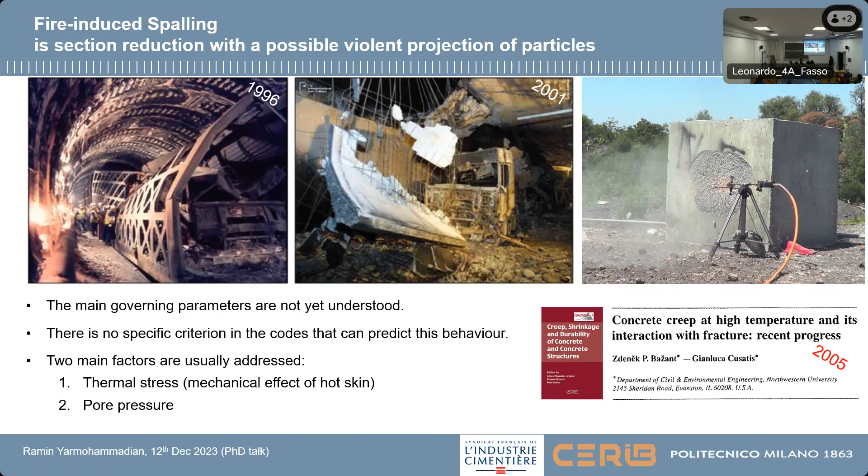But as I mentioned, there is no consensus. No one knows the real behavior, and no one can predict it well. So today we want to explain it in a different way.

In our new perspective, spalling consists of two stages: the first stage is cracking, and the second stage, which follows, is instability of the crack. In my thesis I started by explaining the first stage, the crack generation.

For example, I used results from another PhD student to see how the combination of thermal stress and effective pore pressure can generate spalling in ultra-high performance concrete, in a cylindrical specimen. The combination of both gives a constant value for each concrete, so it's kind of a material property, a threshold.

But with different boundary conditions, the share of these two combinations is different. So with higher heating rates, we get a higher share of thermal stress.

However, mostly my thesis is concentrated on the second stage, which we think is more important, because usually when we assess structures after fire, we see the crack that is there, but the instability of the crack was not completely realized.

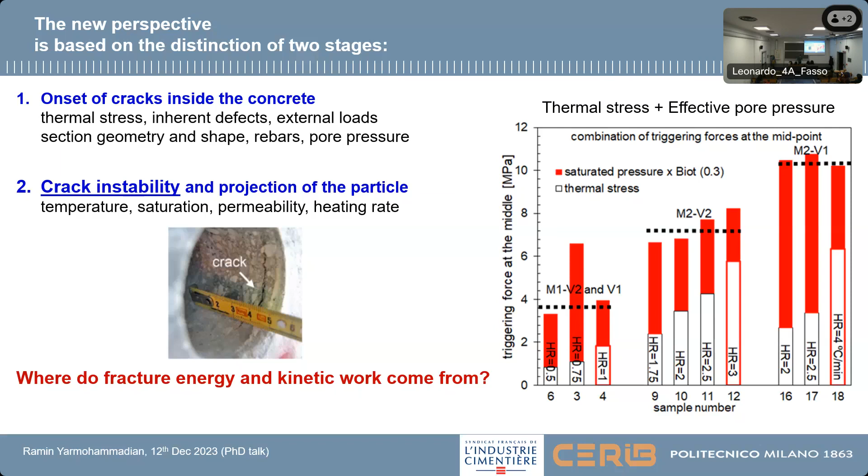As I mentioned, the whole spalling event consists of two stages. If we sum up the energy needed for the whole spalling: we need energy for fracturing the concrete, about half a kilojoule per square meter for a 1 meter by 1 meter concrete, and for accelerating those particles we need about 2 kilojoules per square meter. Summing both, it's 2.5 kilojoules per square meter needed for the spalling.

So what are the alternatives, the options to provide this energy for such an explosive event? The first one is elastic strain from thermal stress. The whole energy stored in the whole concrete cover is 1 kilojoule per square meter, which is not enough for that high energy requirement. So we need to look for an alternative.

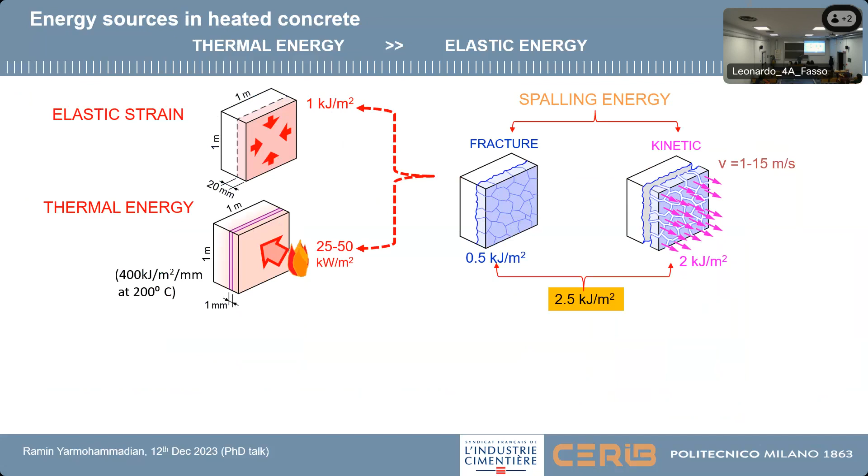And for sure, an alternative in heated concrete might be the thermal energy. Imagine if in just 1 second, 25 to 50 kilojoules is entering the whole cross section. So we have a lot of thermal energy there. And then we are comparing an elephant to a mice.

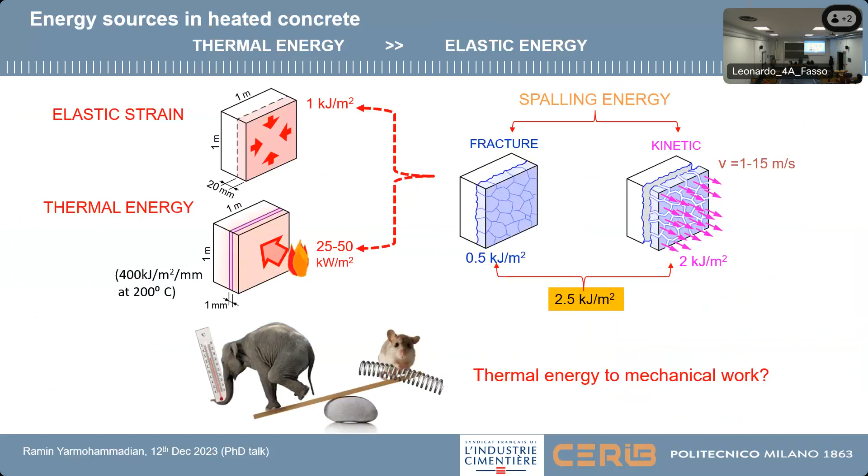So this is the real issue. But the issue is how we can convert thermal energy to mechanical work. And the missing part can be found in the steam engine. In a steam engine, we have thermal energy, and work can be done by means of the water. Water can be vaporized, expand, and then this conversion can be easily done.

So in concrete, we have almost the same problem. We have a porous medium, which is concrete, and these pores can be filled or semi-filled with water. Now 90% of the mass is solid. And these solids, when heated up to 200 or 250 degrees Celsius, can instantly provide energy to the water stored in the small pores inside. So in my opinion, it's even more powerful than a steam engine now.

To understand the magnitude: for vaporization of just 3% of water by weight in a 0.1 millimeter, very superficial layer on two sides of the crack, we need 24 kilojoules per square meter, which is equivalent to a 50 degrees Celsius temperature drop. That's okay, because we have like 200 degrees Celsius there. So if you lose 50 degrees Celsius, it's fine - we're still above boiling water temperature. And that expansion can give us 4 kilojoules per square meter. So you can see easily how this conversion can go.

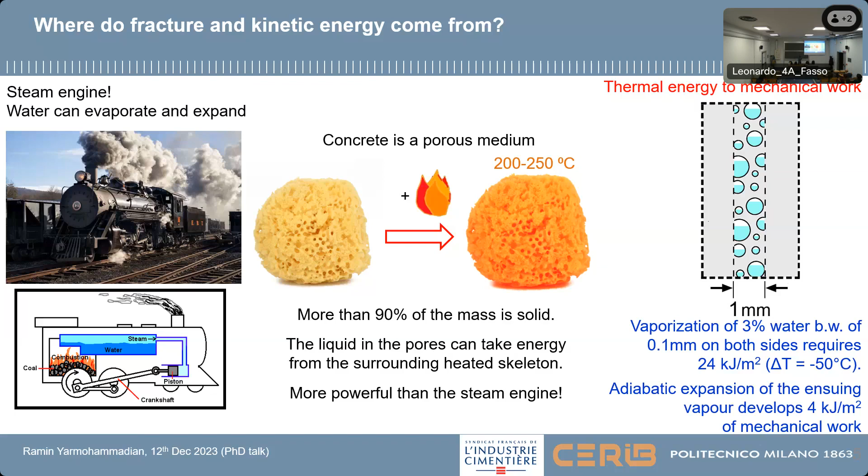So to verify all of this, to understand how much concrete is engaged in such an explosive event, we started to test concrete which is heated on one side, with a gap on the other side. We use neutron radiography - neutrons show hydrogen, and water has hydrogen. So we can understand how much water is present in each radiography picture.

When we heat from one side, the gap on the left side gets pressurized, and then we suddenly open the valve to see how deep the layer engaged in such an event is. The results show just 1 millimeter depth is engaged in a very small fraction of a second - 0.03 second, we are dealing with just 1 millimeter depth of concrete, which is vaporizing and giving vapor to the crack.

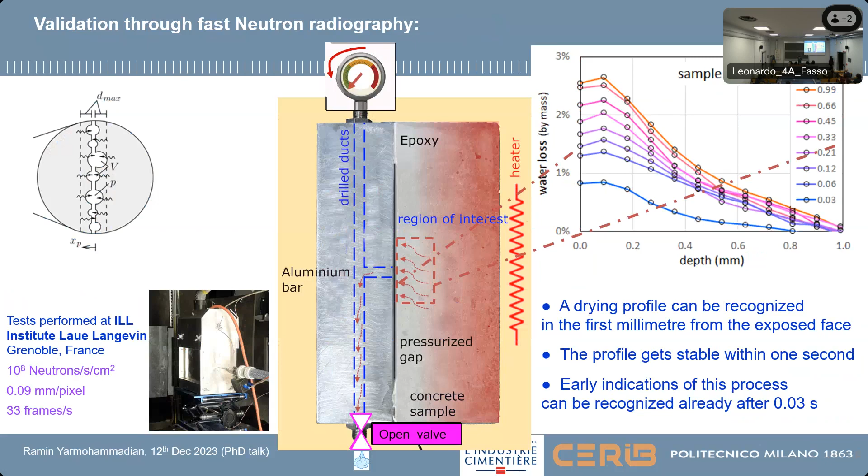In my PhD, we wanted to be more realistic. This time we didn't want to have a gap - we wanted a real crack inside the concrete, like what you see here, generated at the exact time we needed it. So we started to think about two symmetric concrete covers, heated from two sides and separated by a crack, which would be generated at the right time.

The interesting part is the crack is triggered by a polymer. This polymer has higher thermal dilation, and when you heat it, it expands more than the surrounding concrete material. So it pushes the concrete next to it, and we get the crack there, and we can understand if the crack will be unstable or not.

The idea is to fill the first half of the concrete, put the polymer there, then fill the second half, and heat from two sides. All of this dimension and material was optimized using Abaqus, with axisymmetric models, and you can see the first spalling that we could get. This is, I would say, the smallest material-scale spalling test you could see in the world. And you can see the drop of water coming out before the spalling.

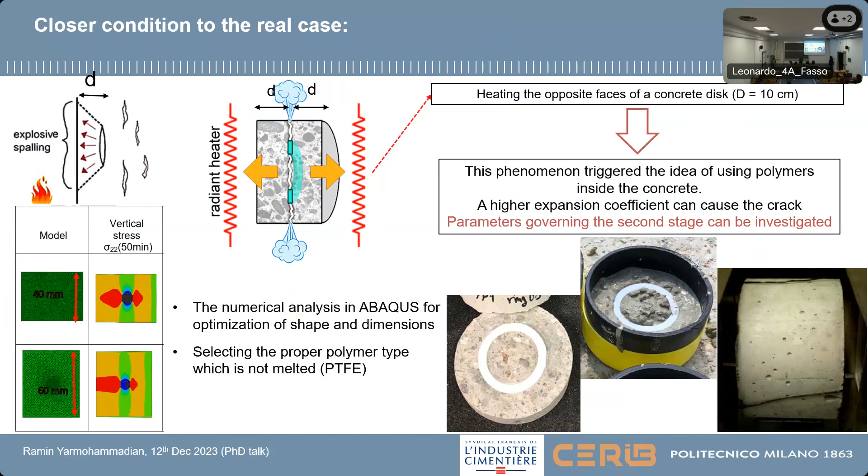The next step for us is how to measure what is happening inside that concrete. The first method was weighing the sample during the whole test - we have a digital scale which is really precise and can give us the drying process throughout the test, and also the sudden mass loss that occurs during the phenomena, as I mentioned. The water suddenly vaporizes, and this converts thermal energy to mechanical work.

The second method is fast monitoring of two parts of the concrete which are accelerating, by means of photosensors, which are also very lightweight and cheap. And since we are dealing with very huge acceleration - thousands of G - each gram acts as 1 kilogram.

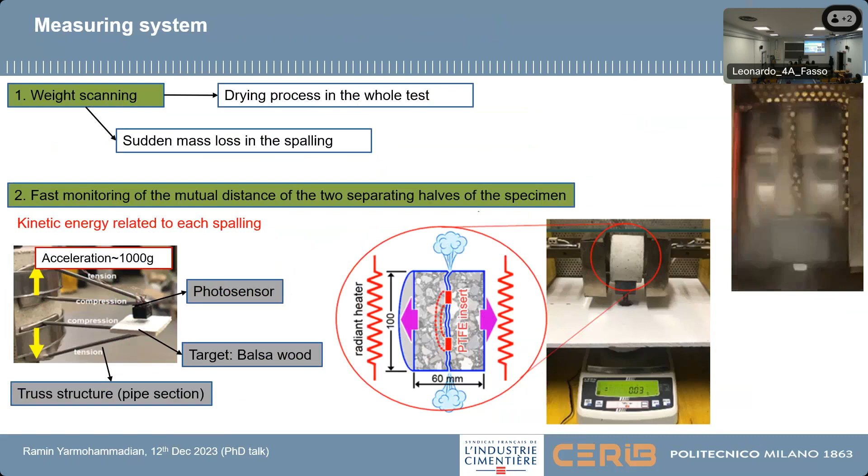Another design parameter is the thickness of polymer which we put inside the concrete. It can change the timing at which the crack happens inside. So we started with 4 different thicknesses, and since we needed to be at a temperature of about 200 degrees Celsius, we chose the 0.5 millimeter one.

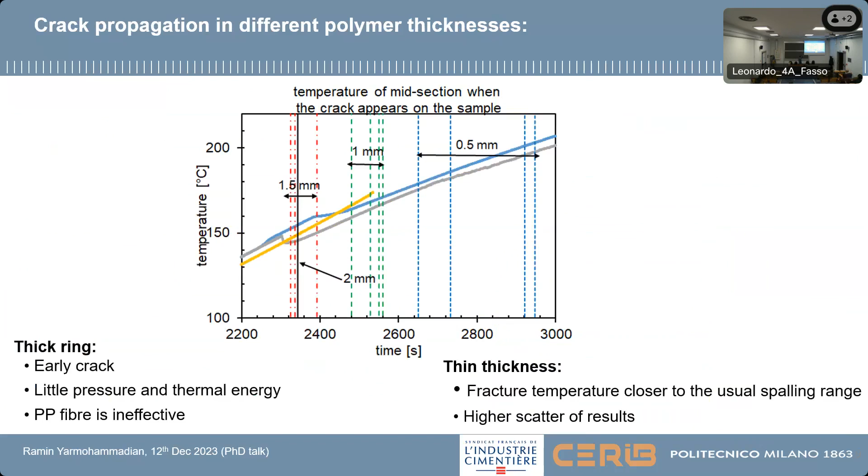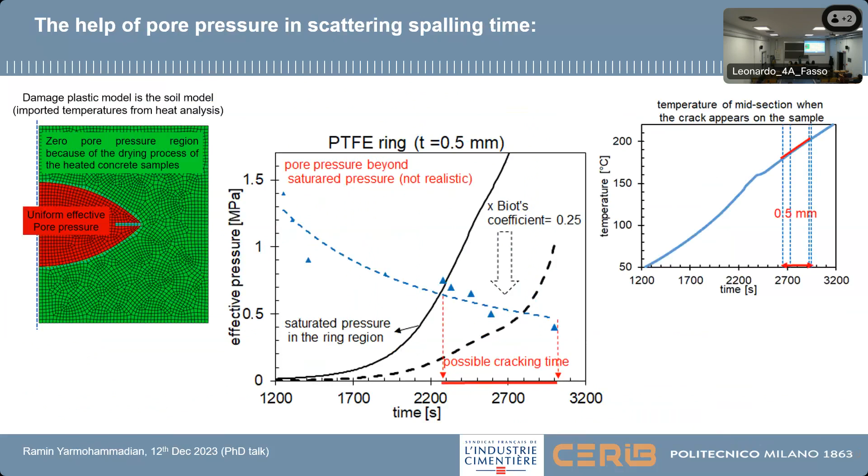But you see that there's scattering. So to find out why this scattering is happening, we started another model. This time it's a soil model, because in the soil model we have the opportunity to impose pore pressure also, which is a leading parameter for us. So by changing the effective pore pressure a bit inside the cracked region, you can see the scattering is happening.

So for the mass loss result, it is known that if we use polypropylene fiber, or PP fiber, we're gonna get less spalling risk. So why is this happening? For example, you can see in some samples, if we use PP fibers inside concrete, the concrete is gonna be drier. So if we have drier concrete, we do not have water which can convert the thermal energy for us.

And then another point here is if the spalling happens later, which is at a higher temperature, the sudden mass loss which is inside the spalling is higher.

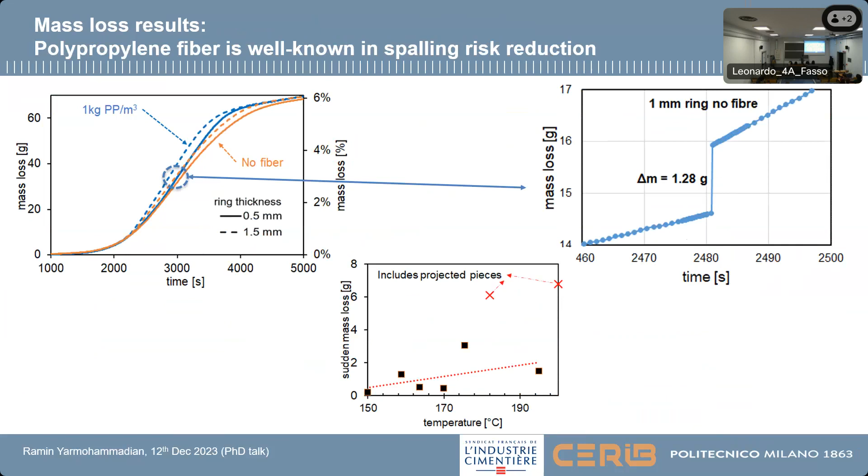To understand more about the real role of moisture, we did tests where we semi-dried 3 samples, and tested 3 moist samples and 3 semi-dried samples. You see 3 out of 3 moist samples spalled. On the other hand, 1 out of 3 semi-dried samples spalled. This shows that moisture is the leading and crucial parameter.

And then you can see that the drying rate after this spalled one has a fast reduction, while in the other one, when it is not spalled, you do not see this fast reduction.

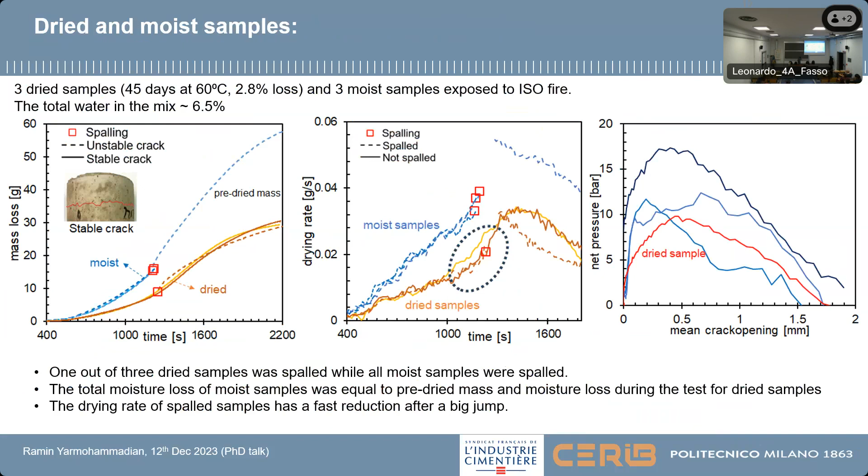So again, we tested many concrete samples with recycled aggregate, with cellulosic fiber, with PP fiber. And also we compared all of those with high-performance concrete, since high-performance concrete is much more sensitive than the normal one. So what is the difference between high-performance concrete and normal concrete?

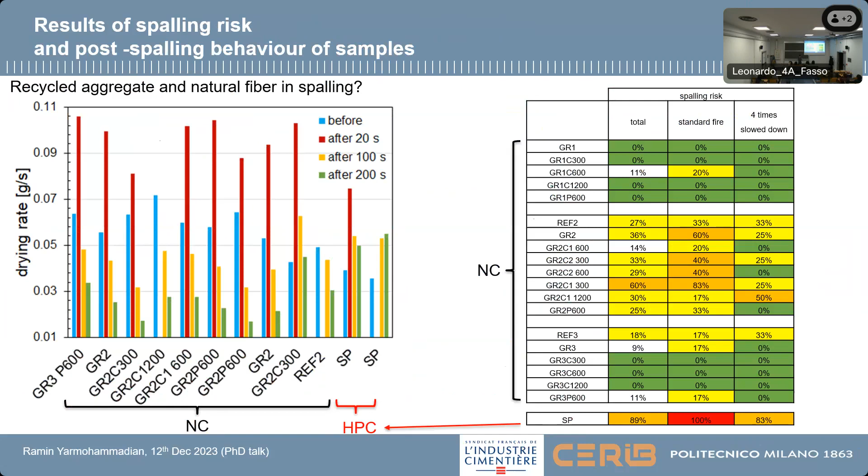As you see, after the spalling, now we have two new exposed surfaces. When we are dealing with normal concrete, we have a reduction in the drying rate, so the two new surfaces are gonna dry easily and fast, and there is no more water there. While in concrete sensitive to spalling, or high-performance concrete, we still have high moisture which is kept there. That's one of the reasons high-performance concrete is very sensitive to spalling.

So what we did until now, we tested all those samples at small scale, but is it actually related to the real behavior of that concrete? So what we did is test the same concrete at larger scale - a large slab, 1 meter by 1.3 meters, with different kinds of initial stress, uniaxial stress. Both our test setup and the larger scale test setup gave almost the same spalling risk.

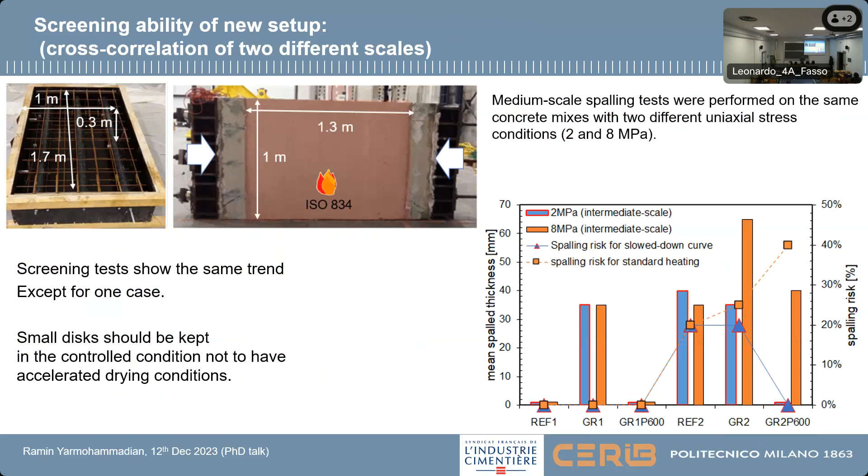But the issue is when we are using a small sample, we should know how much moisture we still have in these small samples. They are not actually the same, because if we keep a small sample and a large sample in the same condition, the small sample, since it has a larger surface-to-volume ratio, is gonna dry earlier. So we should have the same initial moisture.

And then what we got from the photosensor I was explaining is the distance between two splinters. If we get the second derivative, we will get the acceleration. By acceleration, we can understand what is the pressure which was generating this acceleration from inside. So this is the net pressure versus crack opening, where net pressure means the pressure that induced this spalling minus the resistance of the concrete. So the resistance of the concrete is a really important parameter in the spalling process too.

So if we have a sharp falling branch or a mild falling branch after the peak, the difference is completely different, because the resistance of concrete can keep those two parts attached with each other.

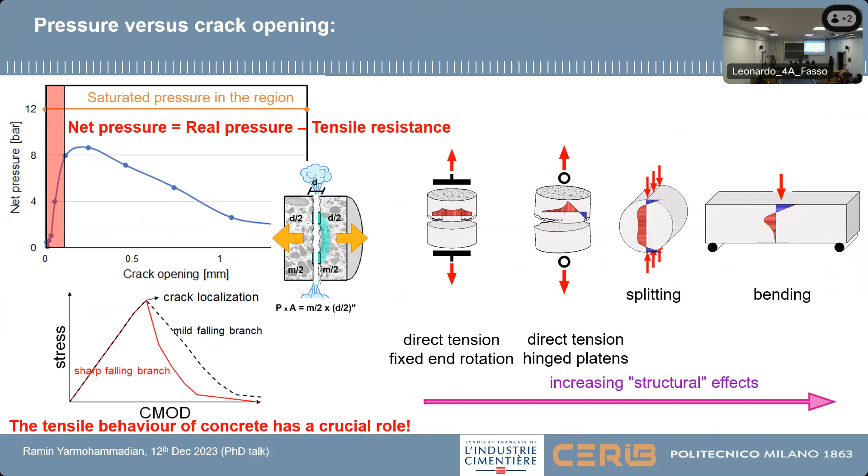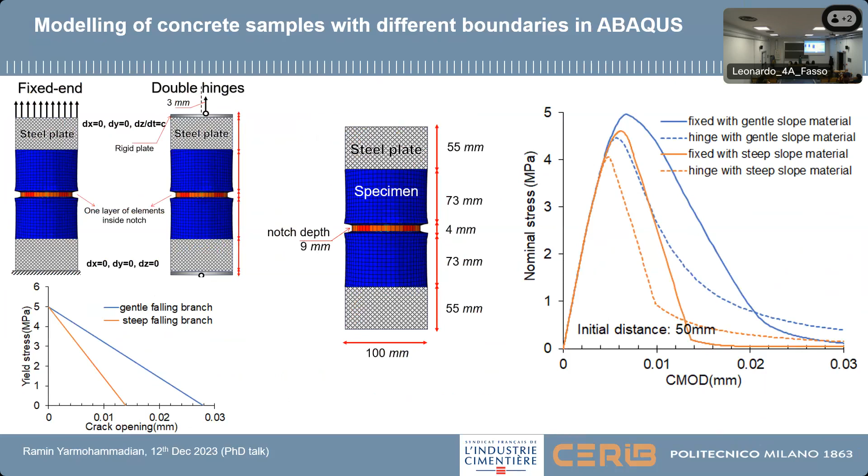While in direct tensile test, it is more related to the material behavior. So we think that the direct tensile test is better to understand the material behavior, and then we started to model again in Abaqus to understand how the boundary condition can change the behavior we are assessing from the test. As you see, if we have two different materials, a simple one with gentle and steep falling branch, and use two different boundary conditions, what we get from the test is completely different. So since we need to get the real behavior of concrete, it's better to use the fixed one.

Another issue is if we go to conventional direct tensile test, there are many problems and we cannot use those. First of all, in the conventional direct tensile test, we have axial instability. So we have two columns. This is maybe the instrument many people know. This instrument is 100,000 euros, it's not cheap.

As you see, when you start pulling your concrete, those columns are compressed and the beam is in flexure. So there is big elastic energy stored in the whole system. It's kind of a network of springs that you are pulling on one side, so they are all working, storing energy, and when the crack starts, there is like a failure in one of those springs. So all the accumulated elastic energy gets released there in a defect. That's why we don't need this, because we need to come back with the actuator to compensate this stored energy. This is maybe feasible for normal concrete, but for high-performance concrete, which has a very steep falling branch, we cannot control this test.

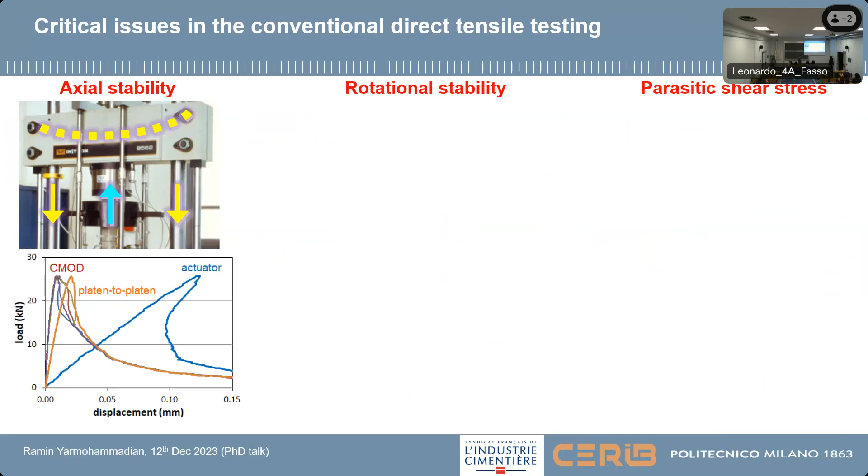The other issue is rotational instability in conventional direct tensile test. Usually, as you know, concrete is not homogeneous. Mostly we have a weaker side and a stronger side. When we are pulling, the weaker side reaches the peak first, and the crack starts from one side. After that, you are cracking on one side and unloading on the other side, so you get a mixed behavior of cracking and unloading, without getting the real behavior.

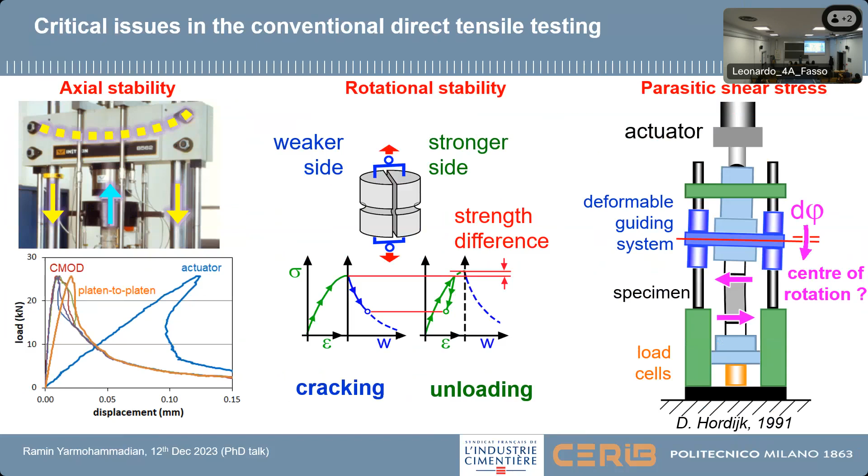Another issue, mostly related to when we are using fixed boundary condition, is that it's not just direct tensile test there, so we will get also shear. So it's shear plus tensile, and then we will get inclined onset or bifurcation, which you can mostly see in literature review.

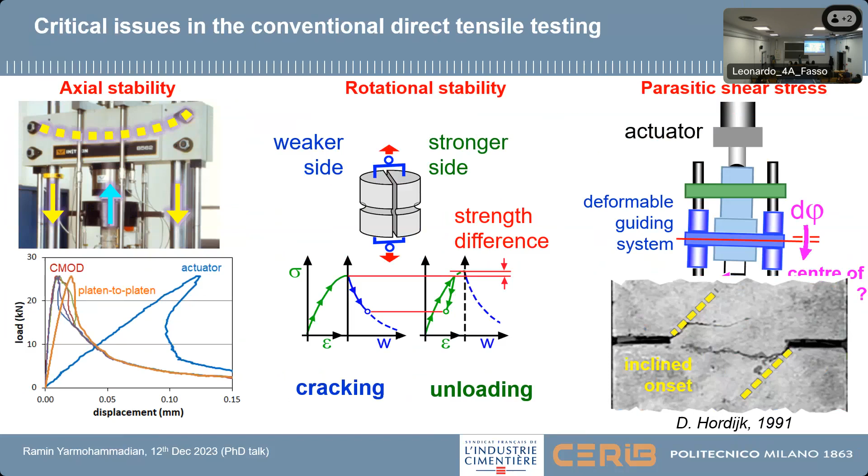We were thinking we should design a new test setup, and in this new setup, instead of having one actuator, we need 3 actuators which can pull concrete from 3 different sides. So if the crack is starting on one side, we can easily understand and compensate it to have a planar crack all around the sample.

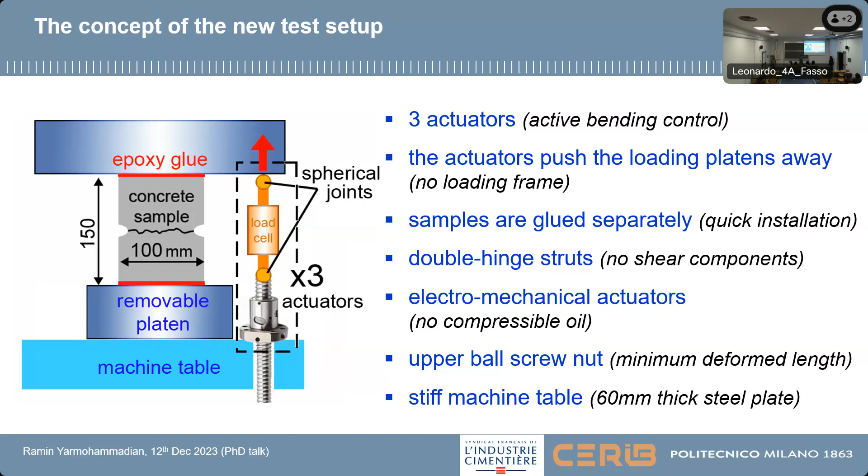Then actuators are pushing 2 platens to reduce the elastic energy stored in the system. We also decided on a lot of different things to reduce the elastic energy stored there, like not using compressible oil, using upper ball screw nuts, stiff machine table, all of those to reduce the elastic strain. And this is the outcome: with the low inertia brushless motor, which has really high acceleration, precise gearbox, and with all of those, we came up with the setup we called 3ACTION.

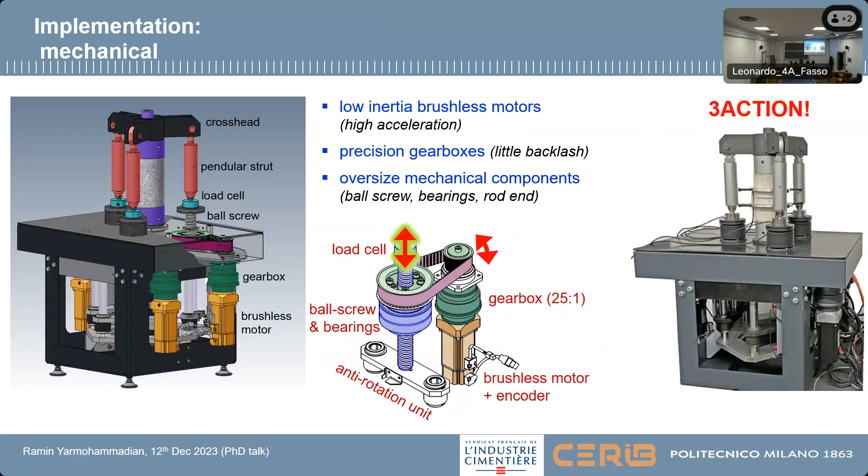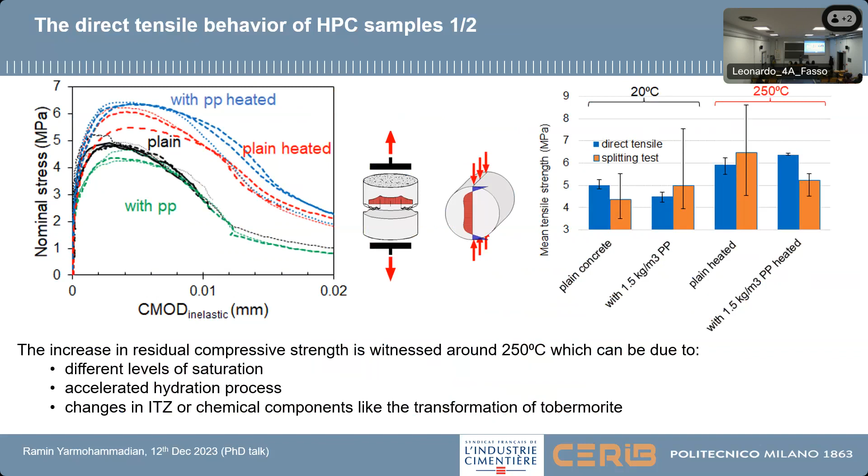Another advantage of this new test setup is when we are done with our sample, after we pull the samples, we're going to have 2 samples for splitting. So we can also test them in a splitting test to compare all of those with each other.

Another thing I wanted to mention today is, as I mentioned, high performance concrete is really sensitive to spalling, while normal concrete is not. Another reason I can mention is here: in high performance concrete, after 0.01 millimeter, we lose 50% of the resistance of the concrete.

So the concrete will lose mostly all of its strength when it is cracking. But when we are using normal concrete, it's not the case, so we still have resistance of concrete which is working. The concrete can still resist direct tensile, which is another advantage of normal concrete in spalling, I would say.

Maybe I can stop here. Thank you for your attention.